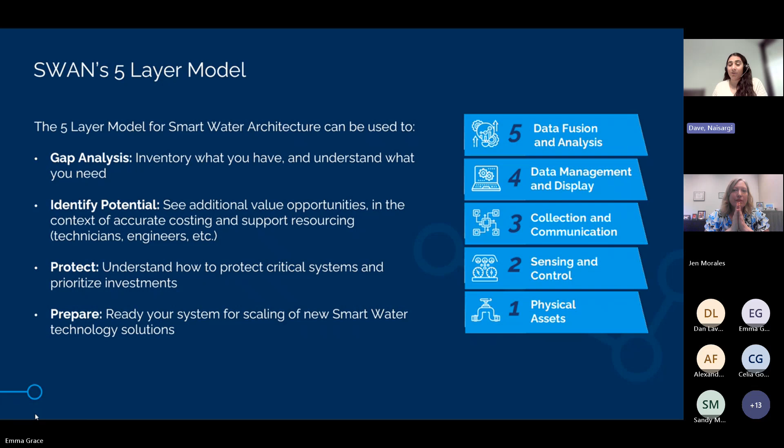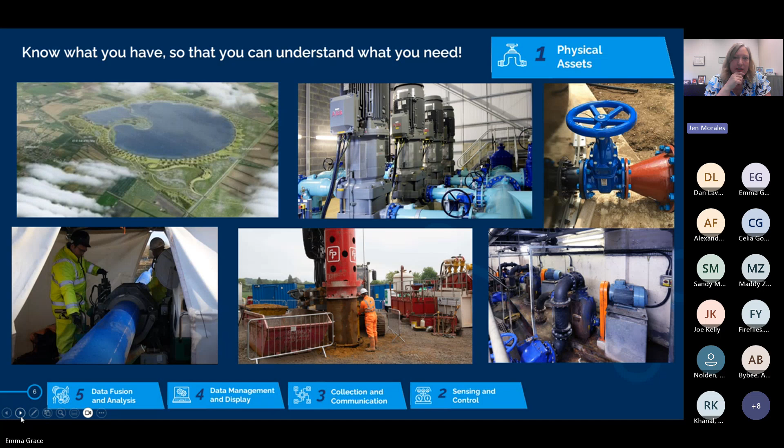So this is just a general accounting of physical assets in water for life. Really trying to think holistically from our water supply, our natural reservoirs or man-made reservoirs, our intake of that water into treatment so it can be purified and distributed. Then as we use the water it becomes contaminated and needs to go through a treatment process in order to become clean again and discharge into the... uh-oh, I got disconnected.

You're still on, what do I do? Can you guys hear me? Yep, I can hear you. You're still on, I don't know if she can hear us. That's okay, she'll be back in a minute.

Anyone have a good water joke they want to tell in the meantime? Well, I'm not very good at impromptu humor. I have to think about my humor, which is not very funny, to be honest.

I don't have a joke, but I'll share my favorite physical asset in the water process. When I first joined Anglian Water, my first experience of the industry, we did a tour of a water recycling wastewater plant and learned that we actually use bugs to help filter out some of the chemicals and nasties in the water before it goes back to the environment, which I thought was so cool. I'd never thought we'd use something like that, but I thought it was amazing.

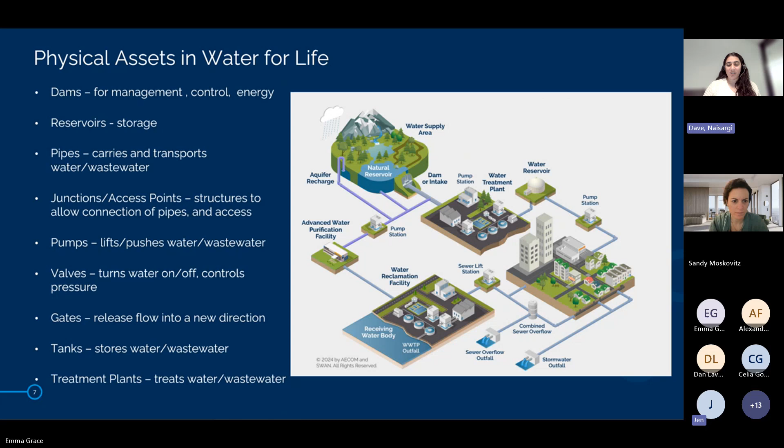Do you want to go to the previous slide real quick so we can see what was mentioned? You know what, it's all good, let's just move on because I got the list of assets. I was just trying to make it interactive here.

Oh yes, people - but I love it. Yes, okay, I didn't have people, so that's good. Energy - yes, energy systems, definitely. Ooh, transient loggers, okay. So yeah, the equipment that we need to measure our assets are also assets.

All right, getting any more? Those are great ones, I appreciate that. Mentioning that for sure - people, huge asset. We cannot do what we want to do, we cannot be smart without people, even creating the technology that we use. Even problem... oh, bugs. Definitely.

Now, I'm not familiar with clams as an asset, someone might need to educate me. That is a story you might have missed - I think Minnesota and there's one more place in the world, maybe Denmark, I'm not sure, but they use clams to monitor water quality. If clams close their shells, then they know something is wrong in the water quality, and it's actually being used actively. That's awesome. Alex makes a good point - clams might be layer 2.

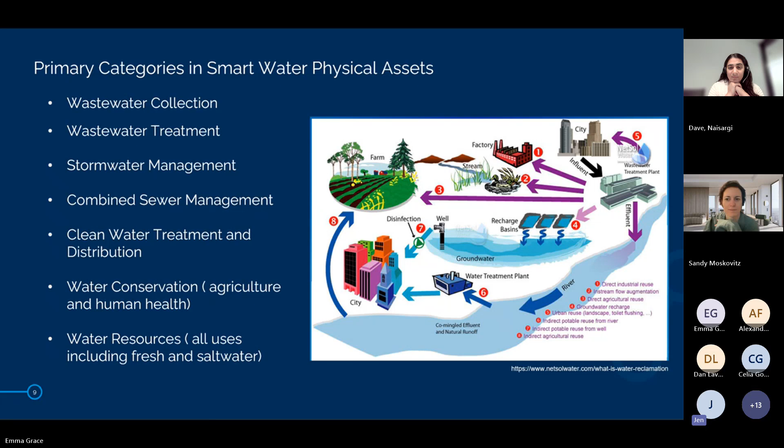In this diagram, which I can't see as clearly now, it basically shows the cycle of water reclamation - the clean, fairly natural water source coming in, being treated in order for it to be clean enough for human consumption, and/or diverted raw for farmlands, then going through the process of getting treated. During that treatment of contaminated water, there's gray water that could serve a factory, or cooling waters, or some biological element in the environment that could take the gray water, or go to irrigation, recharging our groundwater, and/or discharging treated effluent back into the river system.

The next slide, please.

And then waterborne diseases - we know that has not gone away, we still have issues with that. Our dams failing and causing deaths - I'm driving through Montana and you see graveyards of where a dam has come and basically flooded a community and people died, just tragic. And then of course, drought and water scarcity. Again, our motivation to do better is to prevent these unnecessary deaths. Next slide, please.

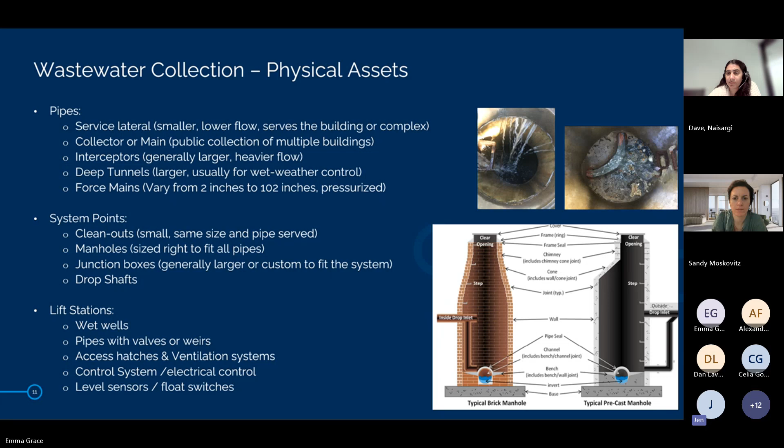The other picture is of a manhole channel. That's also really important if you want to do flow monitoring, so the configuration of that channel will help. If you have good hydraulic conditions, it helps your measurements be more accurate. And if you have a bunch of junk and debris in there, that's really going to affect how well your metering is effective. Then that's just some components of a manhole as a diagram for those who might learn from that. All right, next slide.

So again, starting with our wastewater system, we have both pressurized and gravity networks. Water also primarily uses pressurized networks - if not our primary, yeah, all are. Our stormwater is primarily gravity networks, but there are cases where you'll need pressurized networks, especially in the case of Omaha. We have stormwater collection behind a levee - a Missouri River levee - and we have to get storm water out of our depressed, sumped city out to the river. And then wastewater networks, again, are a combination of pressurized and gravity.

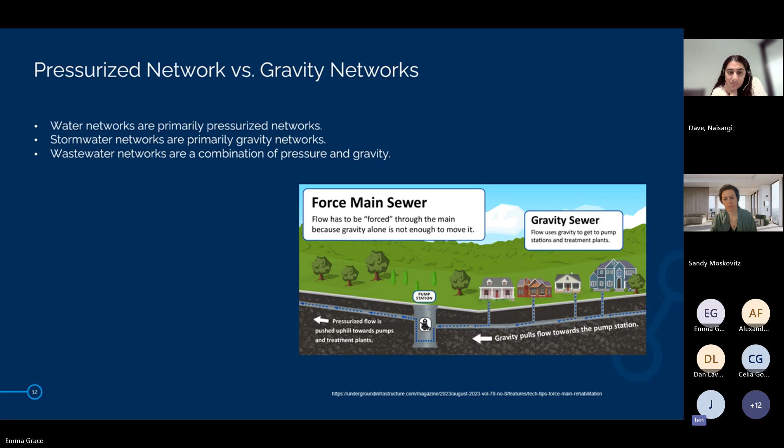And understanding the condition of that manhole is critical as well. You don't want to put your person in harm's way entering a manhole that could crumble on top of them.

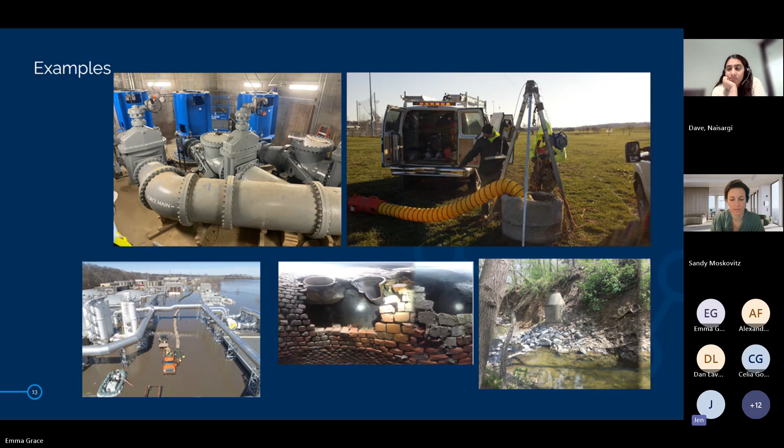All right, moving on to wastewater treatment, or some refer to it as water resource recovery facilities. Again, this isn't just about treating the water, it's about gaining that water back for society. We need to get that water back in a clean state.

In wastewater treatment, we have primary treatment that includes screens, grit chambers, primary clarifiers or sedimentation tanks, pumps. In secondary treatment, we have aeration basins, sludge digesters, media filters or trickling filters.

I'll share a story of our own trickling filter that's 180 feet in diameter, one of the largest in the United States. I can't remember its true age—maybe, sorry, 50 years. But it had a catastrophic failure a couple years ago.

I think we could have foreseen it with some smart technology. If you're not familiar with trickling filters, there are big rotating arms and the water flows out of orifices onto a medium that's growing the bugs, those important assets that help treat the water. Well, the whole mechanism—this huge, like 18-inch diameter bearing—just exploded. It completely fell off its rocker, if you will.

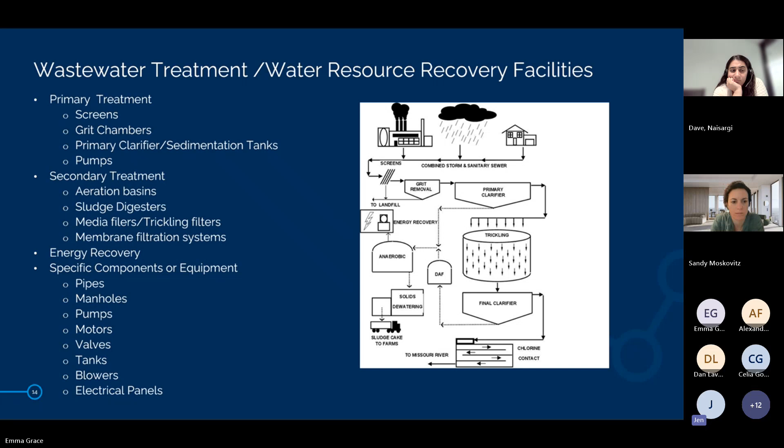All right, we're moving on to stormwater management. Looking at the time check. All right, so stormwater is interesting.

Stormwater is one of those things that I find everybody wants to do better at, but it's hard to find true owners of the stormwater assets. So there are these physical assets out there with pipes and conveyance, with culverts.

Thinking of it as conveying a waterway from one side of an obstruction to the other side—it's not necessarily for stormwater management, it's actually because we interfered with nature. So we have to build a culvert in order for that water to go where it was supposed to go, or where it wants to go.

And then storm system pipes, of course, we have channels, open channels, flumes, weirs. We also have riser pipes we use in our best stormwater management practices. And there's force mains, as I've mentioned before.

There's a question—should we take a break? There was a question that rolled in. Yeah, I think Jen, it's up to you if you want to do the questions at the end or answer it right now. The question is primarily related to the pressure networks. So if you want to answer it now, totally up to you. Okay.

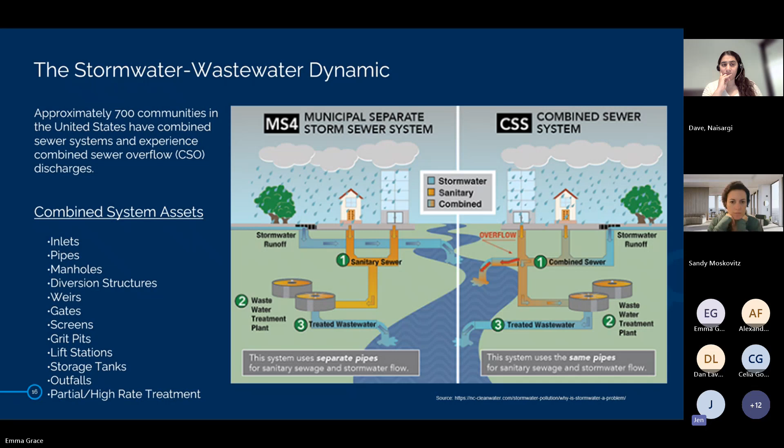We have just a couple examples here. On the left is a stormwater discharge point perched up about 10 feet, partially due to erosion that has occurred over time. And if you look closely, there are actually two inverted wastewater siphons that are not supposed to be exposed in that waterway, and we have to monitor them frequently for leaks.

All right, next slide, please.

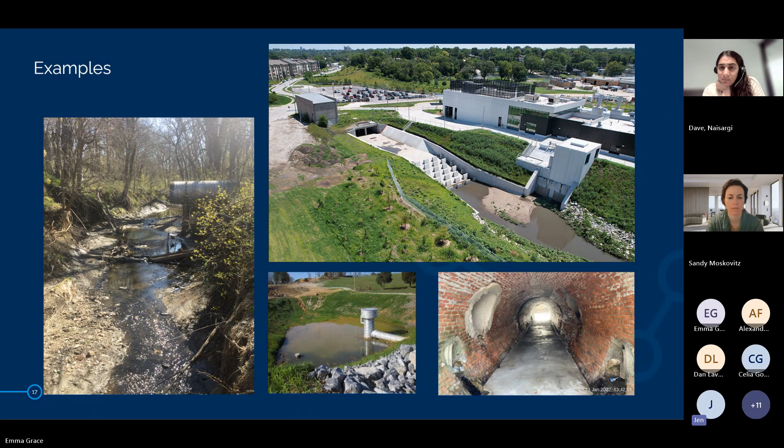I missed highlighting the upper right, which is our high rate treatment. We call it Saddle Creek. It's for our CSO program, and that's the discharge over the baffles before it reaches the creek.

All right, next slide, please.

All right, on to water distribution, my favorite. I'm not a water expert, but in my early design years I had to design water, at least enough to reach my development. The one thing I remember about water is we never knew exactly where it was. You could say the same about sewer, but now that I know what I know, I feel like sewer's a little bit ahead of the curve on knowing where those items are. But water is a challenge, and I know there's tracer wire and other things that can help.

With water, we again have pipelines for distribution, varying in size with service lines and mains. They're all under pressure, some even under high pressure. There are varying materials like PVC, ductile iron, copper, and even lead. I know EPA is encouraging getting rid of lead pipes if they're in the community—I don't know if it's encouraging or regulating this.

With the system points on water distribution, we again have valves and pumps. A new one here is fire hydrants, important for the community, and as we learned with the fires in California, having adequate water supply and access to that water is critical. We also have manholes, usually with valves within them, and backflow preventers, which are very helpful.

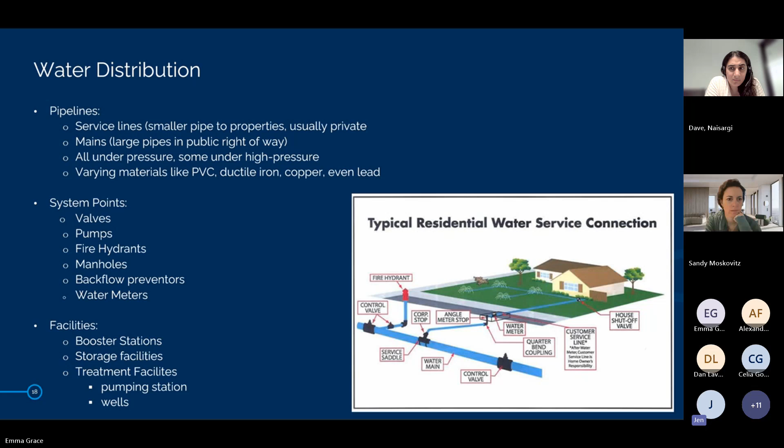There are also water meters themselves, so we understand usage. For facilities on water distribution, there are booster stations that help increase pressure so it can reach its destination, storage facilities like water towers, and treatment facilities, which I'll cover on the next slide.

Within our water treatment facilities, I'll highlight a few things. We have intake structures, basins where they do coagulation, and basins for flocculation—I'm not a water person, so maybe someone else knows all about that, but I'm guessing it's adding chemicals to extract the crud from the water. Then there's the sediment basin, and dosing, not only for the coagulants but I'm guessing a little bit of chlorine as well.

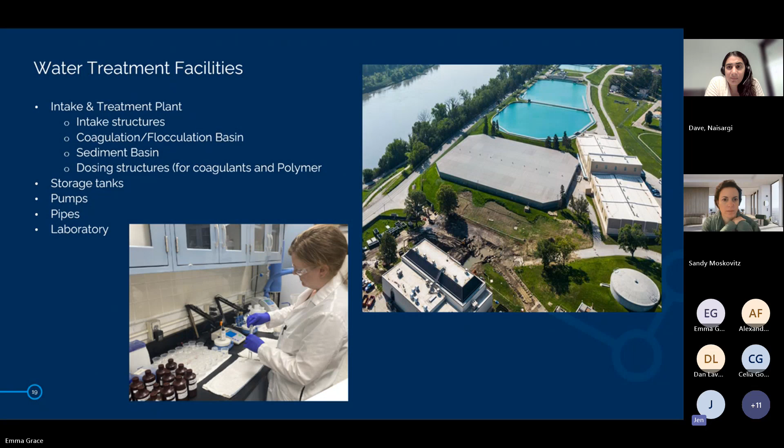There are storage tanks, pumps, pipes, and this last one is true for wastewater as well—it's a critical asset, I believe, and that's the laboratory. It's usually within the facility, takes its own care, and has its own equipment that can get aged, or meters that could be not tested right or calibrated. The equipment could be missing steps, so it's important to care for your laboratory as an asset.

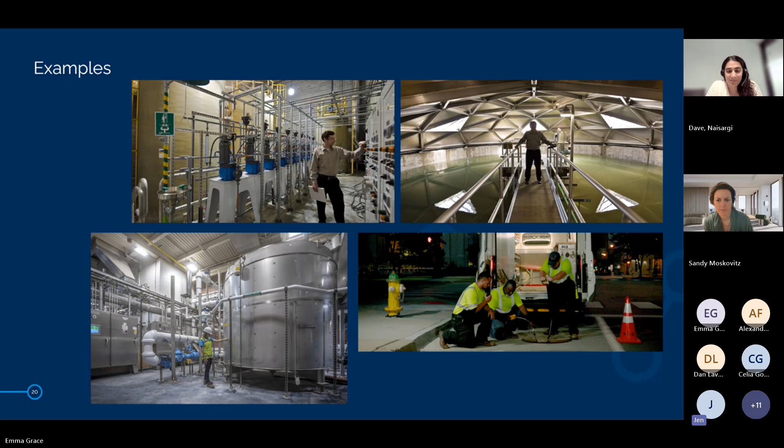You've got the pumps and the dosing and the sediment basins, and then you have the people, important people assets working, it looks like at night. This was likely an emergency, turning something on or repairing something, I'm not sure.

I wanted to touch on some things that haven't been mentioned yet with other water resources and conservation. So we have our natural features: rivers, lakes, aquifers, wetlands, and watersheds, the vegetation. And even though those are natural, they're still assets to our world, and they do take care, need care, especially in a world where man is coming in and destroying those natural features.

And then our man-made features, we have our mitigated wetlands that need to be treated as an asset, not just mitigate a wetland and walk away and never care for it again. We have planned vegetation. That vegetation needs to be cared for in order for that water feature to do the work that it needs to do.

We have reservoirs, irrigation systems. I have a list of what's involved with those, with spigots - I didn't even put spigots, sprinkler heads, nozzles. Then rain harvesting, so catchment of the rainwater, the conveyance and storage and filtration of that. And then fish passage. I thought I'd end there where I began.

That's where my career started. Just reminding everyone that that is another piece of water resources, is making sure there's correct conveyance for our safe environment, safe habitat I should say, and conveyance for fish that need to go back to a certain area to reproduce. And with that, we'll go to the next slide.

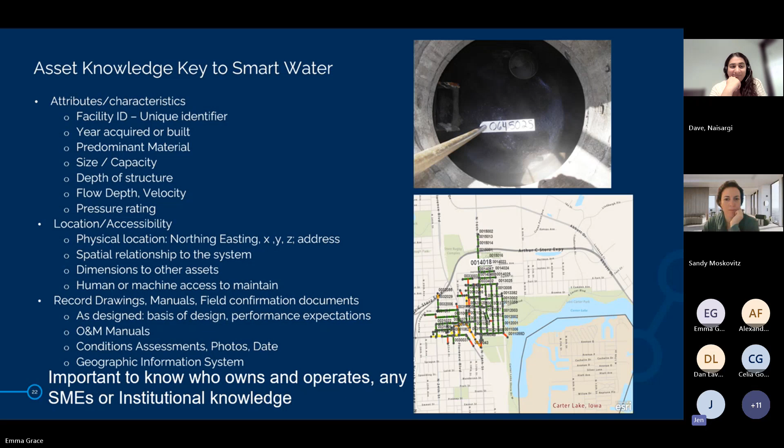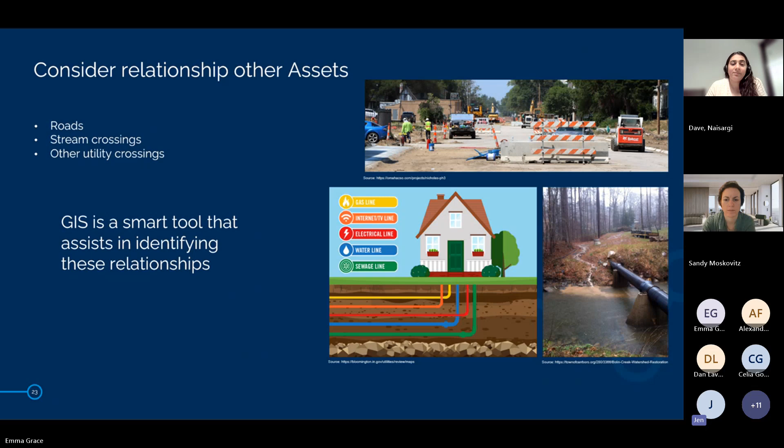All right, next slide. I've mentioned the consideration to other assets. So this is just reemphasizing roads, stream crossings, utility crossings, etc. And a reminder that GIS is a tool that can help you understand how these all kind of overlap and intertwine. Next slide, please.

Okay, I think we're getting there. Lastly, one of the last things, environmental considerations. We're doing this because if we don't protect these assets, we could be impacting the environment and impacting the services that our community needs.

With leaking pipes, excess power consumption, maybe the type of material the pipe is could be leading to health problems or excessive corrosion. The overflows, with the polluted wastewater laden overflows, and then also pavement cave-ins and sinkholes, washing out of bridge piers, etc.

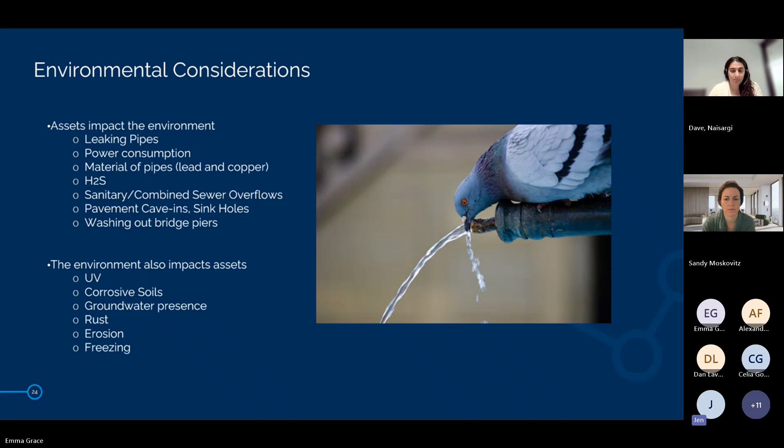And we also can impact, the environment can also influence our assets. So understanding how the sun, corrosive soils, our groundwater presence, what materials and what environmental effects lead to rust, erosion, freezing, etc. Next slide, trying to wrap this up.

Using our data - I saw someone just pipe up. Yes, learning how to use our data better, understanding data as an asset in and of itself, I think is important. It does serve a value. It takes care and maintenance. It has a purpose. So that's a big one to point out.

And then technology that's already in place, that's pretty smart. We're very smart to have, for someone to have invented GIS and for us to make it mainstream now. It was not mainstream in the 90s, it was this new weird thing. And now it's so almost can't live without it. That's how I feel anyway.